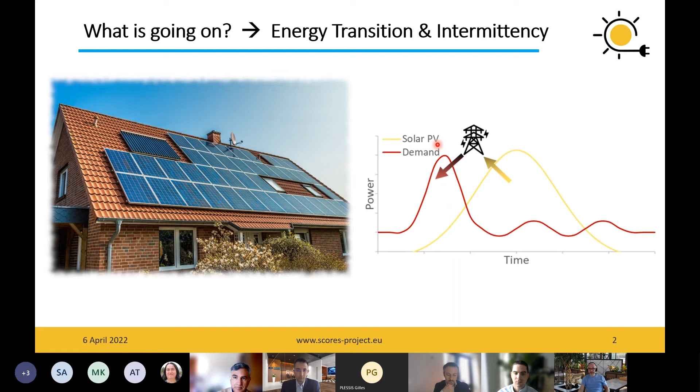Good morning everyone, I'll give you a short introduction on the SCORES project. So what is going on, what is it all about? It's all about the energy transition and the intermittency it will give us. You can put PV panels on your roof, but at times when you want to cook, there's no sun, and when there is sun, you don't have to cook. So there's intermittency and a mismatch between production of sustainable energy and the demand for it.

Furthermore, for example in the Netherlands, our local grids are really at their limits. You can't just put an additional wind park in some regions in the Netherlands. It's the same in some other EU countries, and this means we have very limited possibility for installation of large-scale renewables like PV and wind parks. Even sometimes the PV panels on the roof of domestic buildings cannot deliver back to the grid. This means a lot of energy is wasted.

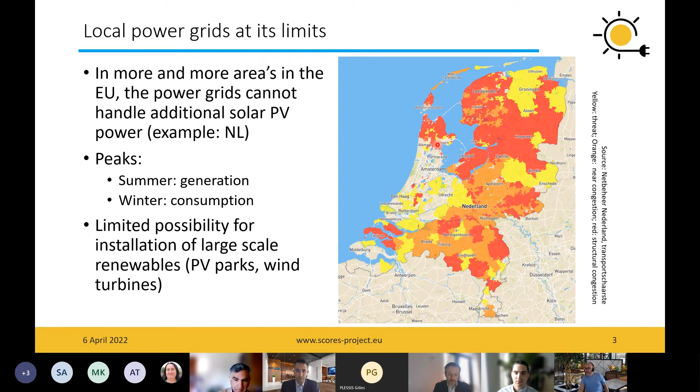A solution for that is to use storage. So the SCORES project is about self-consumption of renewable energy by hybrid storage systems. It aims to combine and optimize multi-energy generation, meaning electricity and heat, storage and consumption of local renewable energy and grid supply. Via the development of these compact storage technologies, we integrate everything in a building using a building energy management system, leading to reliable operation over the year with intermittent energy supply and demand. We are also looking at cost, because we want a positive business case.

The SCORES project has 12 partners. It started in 2017 and runs until this month, April, so this is the last month of the project, with a budget of about 6 million euros.

This is the overall concept. In the middle we have the SCORES hybrid system: we have electricity storage, it can convert electricity to heat, and we also have heat storage in the project. On the input side, we have surplus renewable energy from the grid if available, locally produced electricity, and district heating; we could also have grid feeding in from industrial waste heat, for example. On the demand side, we have apartment buildings and houses with space heating, domestic hot water requirements, electricity use, and we can also feed our PV back into the grid if possible. So how can we optimize this whole system such that no energy is wasted anymore?

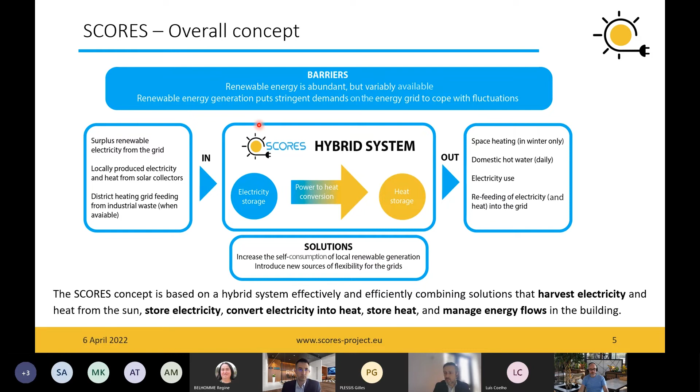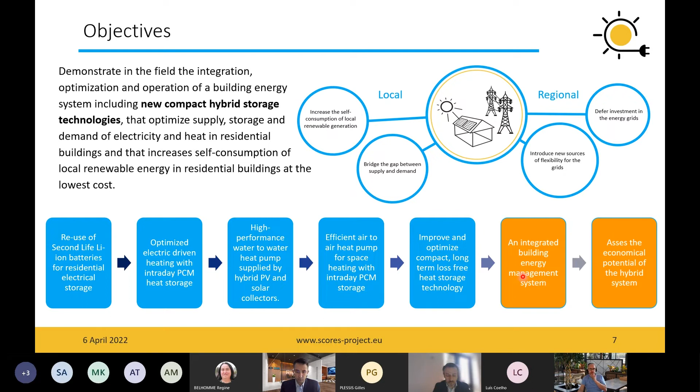The objectives of the project are to demonstrate in the field of integration, optimization, and operation, new compact energy storage technologies, connecting the urban environment with the local and regional environment. We develop 5 main technologies - I'll come back to that later and show some pictures. Then we integrate everything using a building energy management system, and assess the economic potential of the total system.

So these are the demonstration cases. We have 2 cases, one demo in Austria and one demo in France. The Austria case has a connection to the heat grid, and the France demo does not, because in France mostly cooking and heating is still done with electricity.

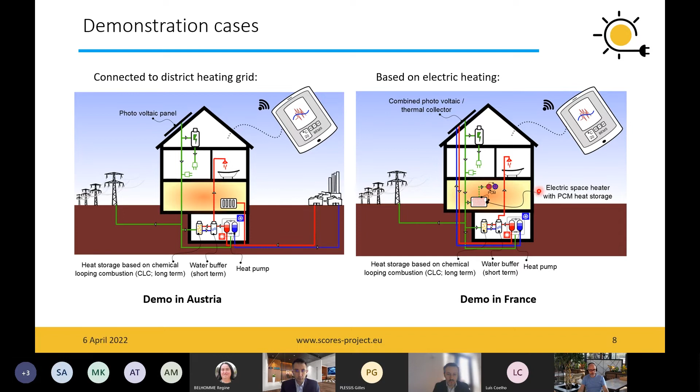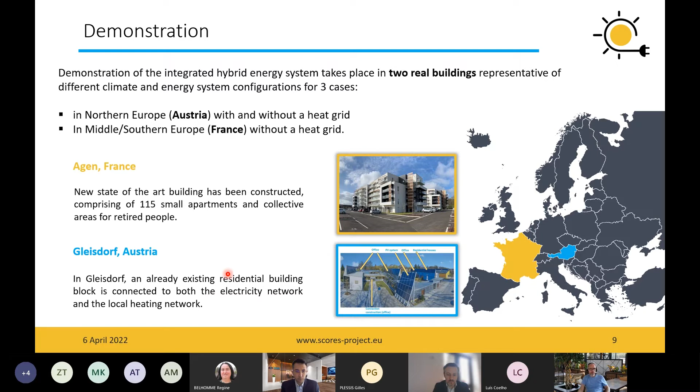So Agen in France is a new constructed apartment building with 115 small apartments. And in Gleisdorf, Austria, we use an already existing residential building block connected to both electricity and local heating networks. So 2 regions in Europe with different climate conditions.

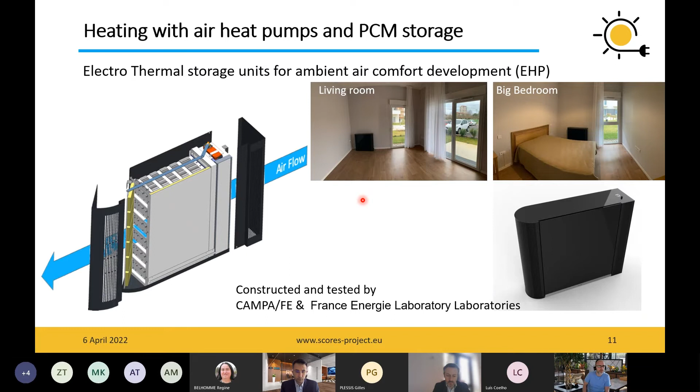Now I will quickly go through the technologies I mentioned earlier, giving you some pictures and ideas. What we developed is heating with air heat pumps and PCM storage. Here you see a picture of it in a room - you can install this in the living room or a big bedroom. It can heat your room, but it can also temporarily store heat, for example at night when you use it, and in the daytime we can charge it using PV panels.

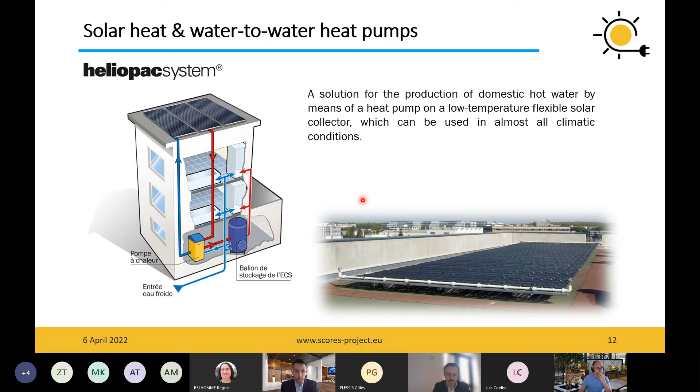We also installed and demonstrated water-to-water heat pumps. That's a solution for production of domestic hot water. We're using low temperature flexible solar collectors on the roofs, and then a heat pump to raise the temperature from water for use, for example, in showering or heating.

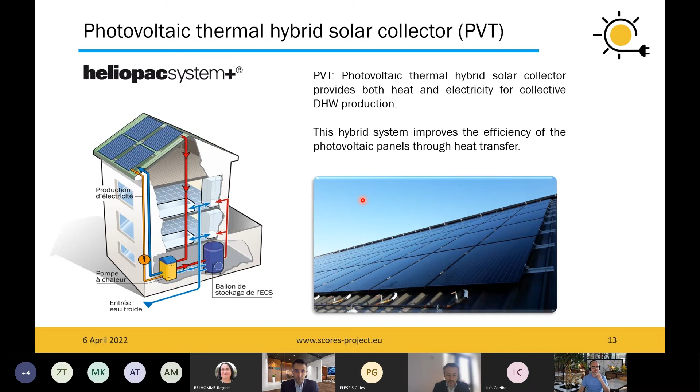We also use photovoltaic solar collectors, but hybrid, so both PV and heat. This hybrid system improves the efficiency of the photovoltaic panels through heat transfer because it lowers the temperature of the PV. So you get more out of your PV, and also get heat delivered at the same time.

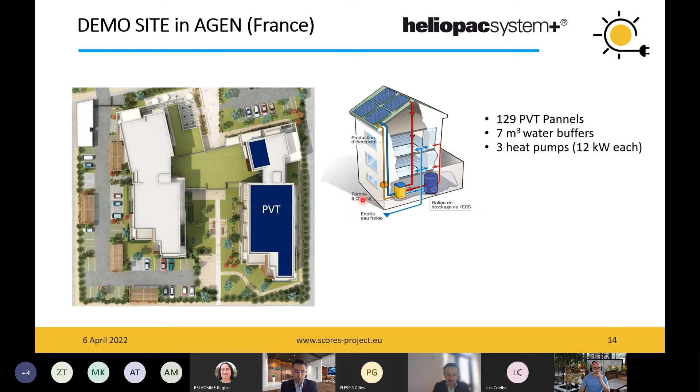So this is the layout of the demo site in Agen. We have 129 PVT panels, 7 cubic meters of water buffers which is also heat storage, and 3 heat pumps. On these roofs we put PVT panels, and that looks like this.

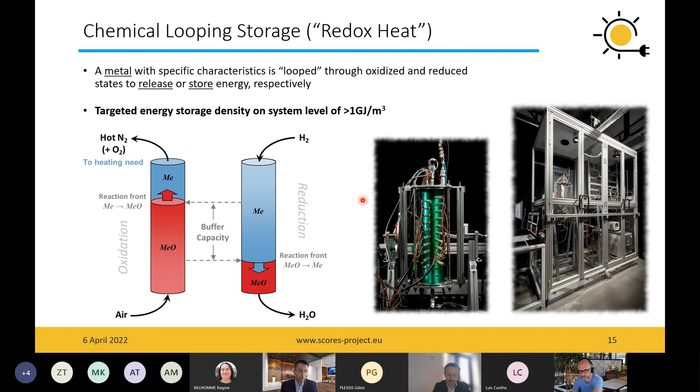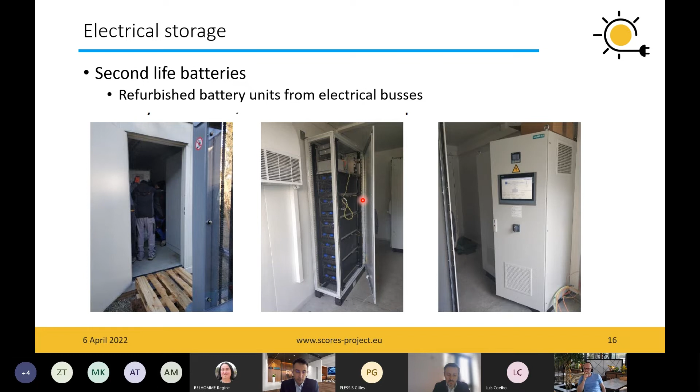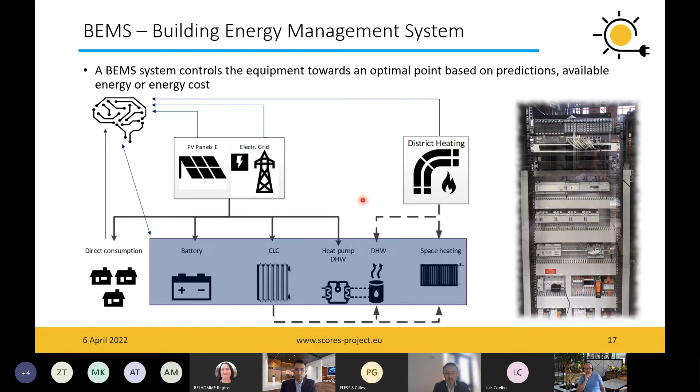Finally, we connect everything together using a BEMS, a building energy management system, that controls the equipment towards an optimal point based on predictions from the weather and also the available energy or energy cost. So it can take from the grid, deliver to the grid, use the PV electricity for direct use, or store it, with a smart grid algorithm to optimize everything towards optimal use, self-consumption, or economic benefits.

Also, this holds for the batteries, actually. We learned from the second life batteries that these battery cells are proprietary to the brands that you use. There are, for example, control systems in batteries that we cannot open up. They're not open source, so we sometimes don't know how to connect them properly, and this is very important in the future. We would not now suggest using second life batteries, but just use first life new batteries for electricity storage. But when we started in 2017, we had a different opinion.

So standardization of technologies is important. Grid aspects are important for heat and electrical grids. It's about capacity of the grid. If you want to have flexibility of the grid and feedback options, this should be possible somehow. It's not possible everywhere. So there comes the role of the grid operators, smart grids. If you want to optimize in an urban community, you need to also have smart grids providing data to a central point and distributing the energy in an optimal way.

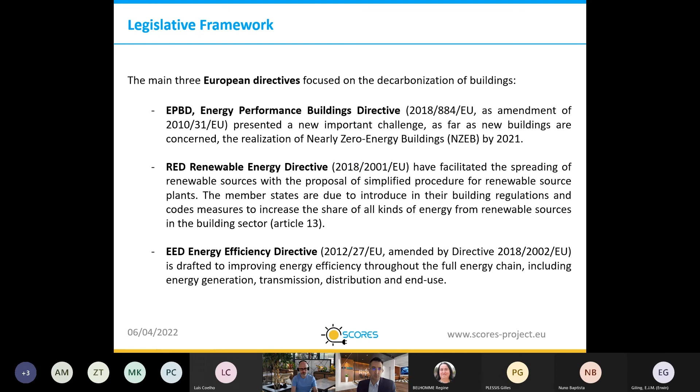I want to focus first of all on a concept and what happened from the directive of 2010 and the recast that we foresee in 2022. We start to talk about near zero. We have talked until now about near zero energy buildings.

So we reduce the consumption and use half of the energy from renewable sources. But we will transition to another concept. The new directive talks about zero emission buildings.

So we start to define this building where CO2 production should arrive at a very, very low level. So the focus is not on energy, but the focus is now on emissions, and which is the main tool we can use to reach this emission reduction is defined in the recast proposal.

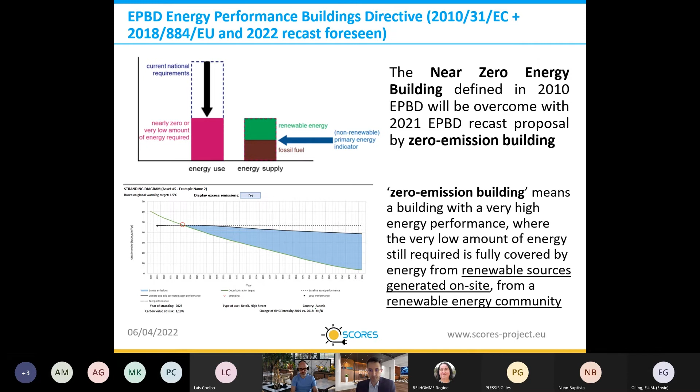They talk about production with renewable sources generated on site, like the SCORES project proposes, and the renewable energy community. So it's become crucial to store the energy and try to produce as much as possible the renewable energy on site.

I show you the main pillars of the EPBD directive, and in red I show you the news that we foresee about the upcoming recast. So there is the methodology of calculation, minimum requirement. We'll see all these aspects in the next slide.

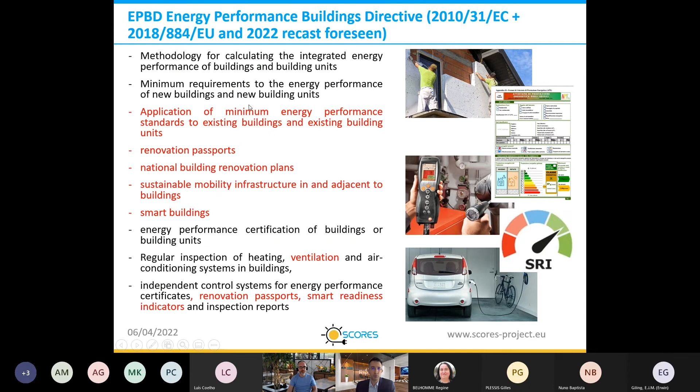There is also some news about the minimum requirements, so I want to show you this aspect too. About the minimum requirement of energy performance of buildings, we start talking from 2027 about zero emission buildings. All new buildings occupied or owned by public authorities from 2027 will become zero emission buildings.

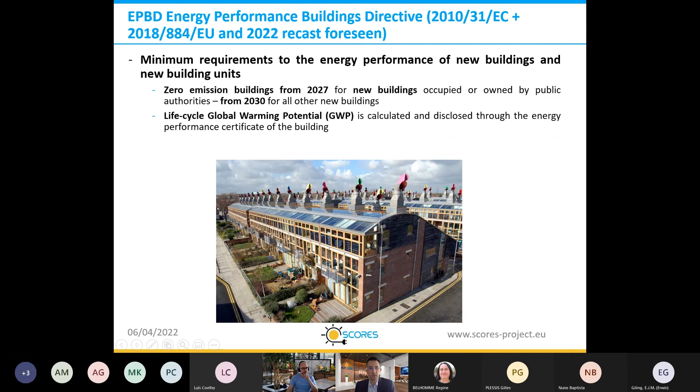And from 2030, all other new buildings will become zero emission buildings. Another important point is that the life cycle global warming potential is being included into the energy performance certificate. As we already saw, the global warming potential, the CO2 production, has become one of the most important indicators.

In the future of building environmental evaluation, another aspect that is very controversial, because it could have a very strong impact on the life of people and on the whole real estate world, is a standard for energy performance of existing buildings.

Until now, all the European legislation talked only about the improvement of energy performance on new buildings, or refurbished buildings, or when you change the boiler or the generator. In this case, we're starting to talk about existing buildings, and it's required from 2027 to 2033.

That also the existing buildings, the worst, most energy inefficient ones, shift their energy performance at least to class F or class E, and should shift their class.

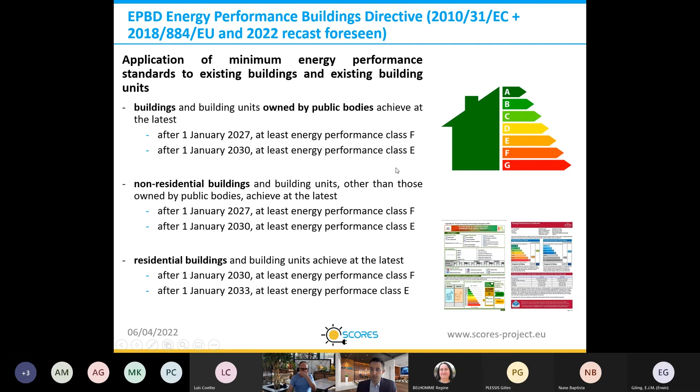So will it be required intervention also for existing buildings? I don't know how the member states interpreted this. I don't know also if this aspect, that is very controversial as I've seen, will be included into the final version of the recast, but the document shared by Europe right now does include this aspect.

Another interesting news is the inclusion of a new document called the renovation passport, quite similar to the energy audit, because it includes in the building analysis a focus on renovation steps in order to transform a building into a zero emission building by 2050. It should include the expected benefits in terms of energy saving, savings in bills, operational greenhouse emission reduction, health and comfort in the building, and information about financial and technical support to achieve this objective.

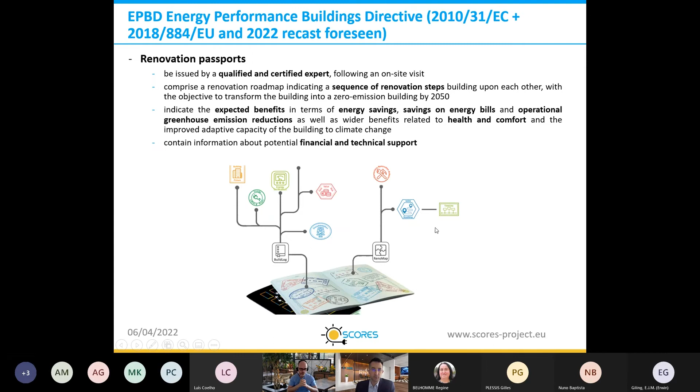Other aspects included in the EPBD are the inclusion in new buildings of electromobility infrastructure, and self-regulating devices to regulate indoor temperature, plus the obligation for all non-residential buildings to have a building automation and control system. This is very important for SCORES, because in order to manage all the energy coming from different renewable sources, a building automation system is crucial, fundamental - we cannot avoid having this system, and it became an obligation for all non-residential buildings as well.

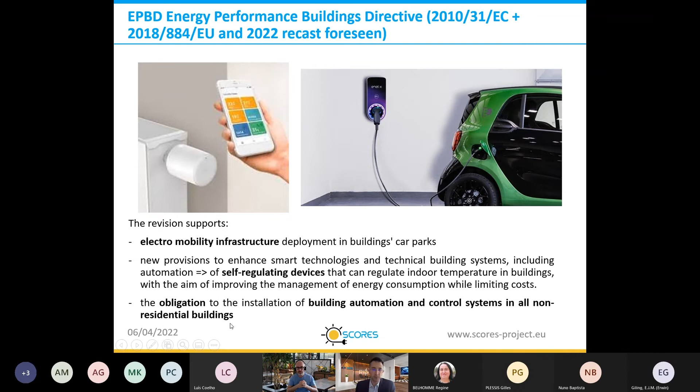About the smart readiness indicators - it's a new tool that shows you the smartness of the building. So it shows if a building and its BMS manage to adapt to the operational needs of the occupant, optimize the energy performance, and allow energy flexibility.

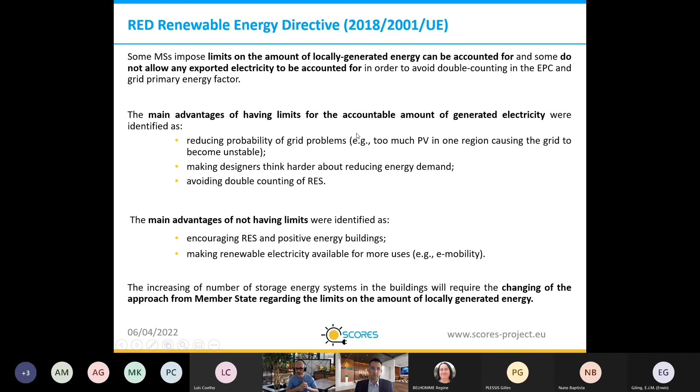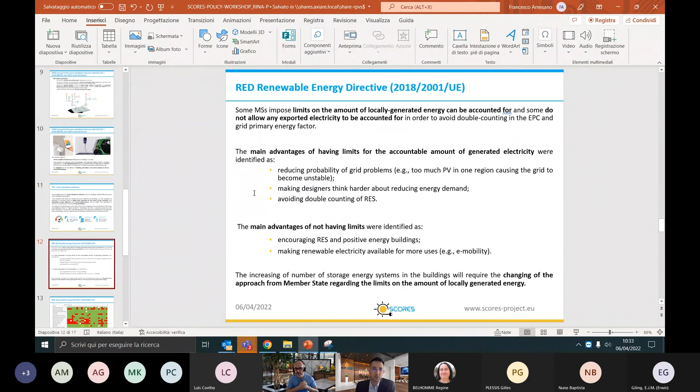I can conclude my presentation with this. I'm more focused on this aspect, but in the presentation you'll also find some indication about the Renewable Energy Directive, Energy Efficiency Directive, and the internal market for electricity as well. Thank you, if there is some question, I'm available.

Thank you very much, Francesco. Are there any questions from the audience or from the co-presenters of today? If not for the moment, I would like to thank you, Francesco, again for your quite complete presentation about the legislation and regulation aspects of storage technologies in general in the built environment.

I would like to invite now our following speaker, Nuno Baptista from Adene, to present us his view on these topics. Let me first briefly introduce Nuno. He is an architect and coordinator of the Building Energy Performance Certification Scheme in Adene, which is a Portuguese energy agency. He joined the building department in Adene in 2010, working on quality assessment and on a managing platform for issuing energy certificates. He will present us today his view on this topic of legislation in Portugal.

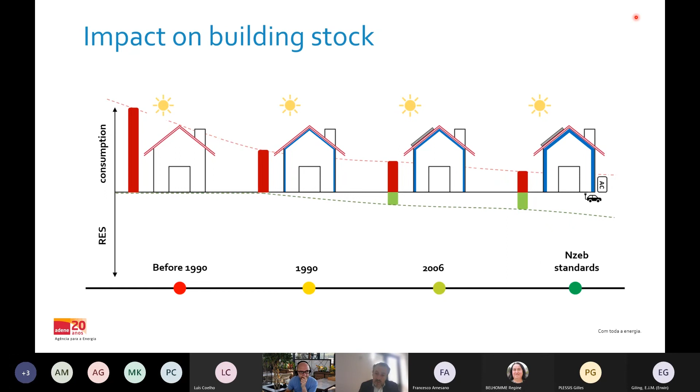So basically reducing the energy consumption and improving the amount of renewable energy sources, we tend throughout the years to achieve NZEB standards, and hopefully from the upcoming directive, zero emission buildings throughout the years. These latest regulations also include electromobility and other aspects, allowing us to have more intelligent and more interconnected buildings throughout the years.

The requirements that buildings must comply with include requirements for the building envelope, windows, technical building systems, as well as energy performance and thermal comfort requirements.

But building owners must have some additional obligations regarding this same building. So they need installation and maintenance obligations, reports, technical system documents. Where applicable, they need periodic audits, building automation and control systems, electromobility, technical systems inspections, and control of indoor air quality. So a lot of obligations that building owners must comply with to have this kind of building and to have them in the normal running stage.

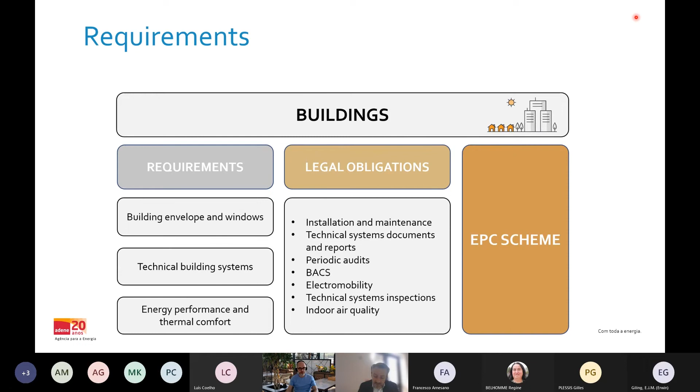And the third part of the regulation focuses on the energy performance certificate scheme as a whole.

Apart from this building regulation, Portugal, as well as other member states, had to put in practice this long-term renovation strategy, focused specifically on building energy renovation. The idea is to have, by 2050, a building stock that is decarbonized, very efficient in terms of energy use, and upgraded to these NZEB standards.

All the policies and actions that support this strategy were designed to foster deep renovation of these buildings, and the idea is to try to diminish and overcome what we have as less efficient buildings, and again focus also on reducing energy poverty.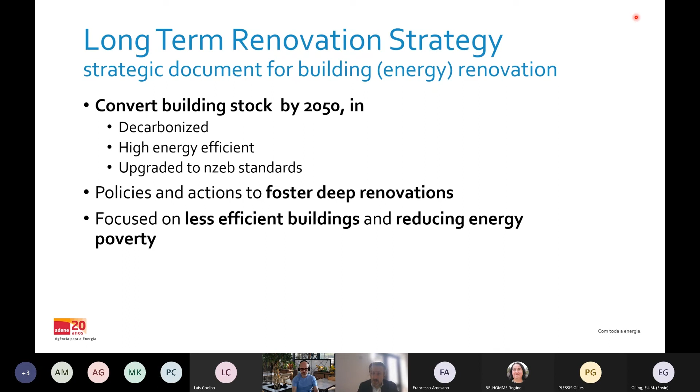The long-term renovation strategy sets 3 goals. The first one tries to focus on the improvement of the living conditions for building occupants or tenants, this being one of the major issues that were identified also in studies regarding energy poverty.

It's also an opportunity for economic growth and a means to achieve the energy and environmental goals that Portugal has agreed upon. On top of that, due to this COVID scenario, it's also a possibility for a revival of the economy after these years of pandemic that we still live in.

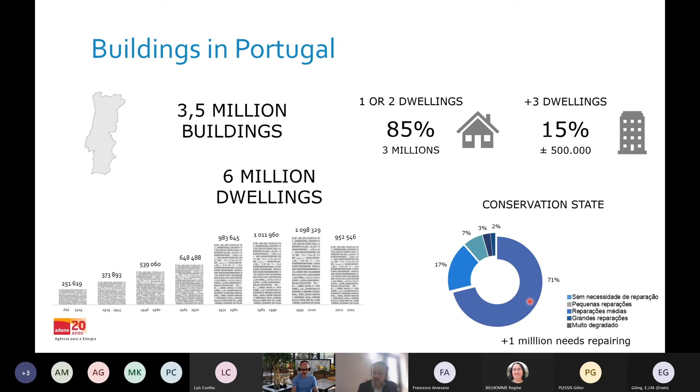According to the National Institute of Statistics, we have still a quite significant share of buildings that already need repairing. So the idea is to try to combine the need for repairing with these strategies and try to boost the renovation and improvement of these buildings.

Like I said, until 1990 there was no regulation that applied to buildings, and we see that almost 4 million out of those 6 million dwellings were built before 1990. So we have a significant amount of buildings, or dwellings, that don't have any requirement or concern, when they were built, regarding comfort or pathologies, or trying to improve the quality of living for those tenants.

Throughout the years, we had different regulations that applied. However, the number of buildings that were built within this scope is much more reduced. So no matter how demanding these last 2 regulations were, they tackle a very reduced amount of the building stock.

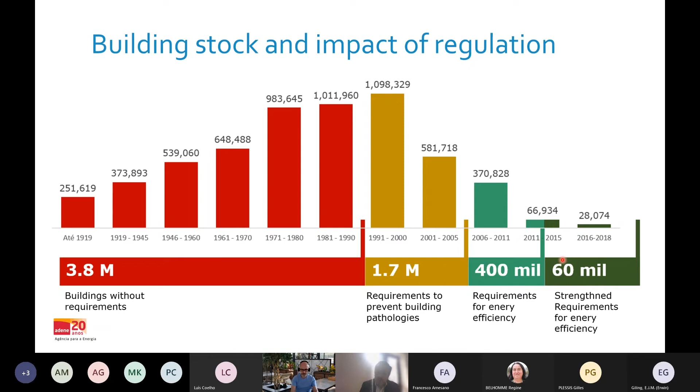The energy performance certificates scheme, we consider it a very robust system. We have had it for 14 years now, more than 2 million EPCs already registered, more than 3.5 million recommendations or improvement recommendations proposed.

Over these 2,200 experts scattered throughout the country. The investment of these recommendations is estimated at over 10,000 million euros of investment, and 1,300 million euros per year expected savings if these measures were applied to the buildings.

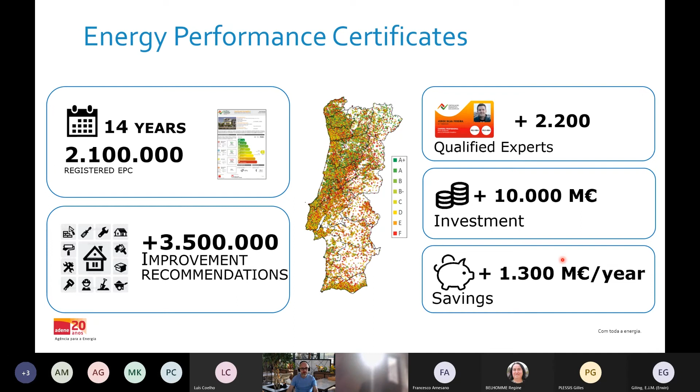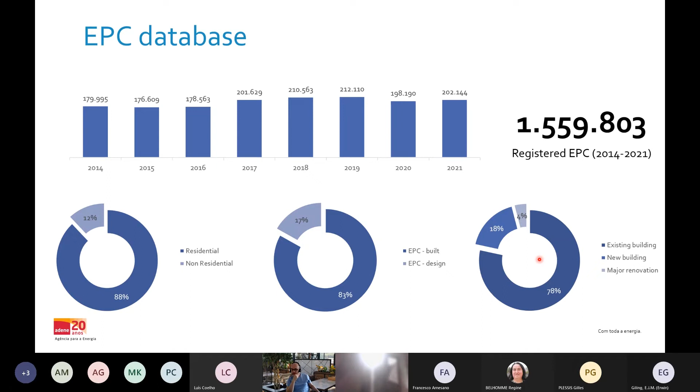Quick overview of the last years: a number relatively constant of almost 200,000 EPCs issued per year, mostly residential, 90% residential. More than 80% of these EPCs were for already built buildings, and only a small share issued at the design stage, where a high level of energy performance must be achieved. Most EPCs are issued for existing buildings, and only a small share for new buildings or major renovations, which remain a more reduced share of the EPCs issued in Portugal.

This is the percentage of energy labels that we have. We have an inefficient building stock, almost two-thirds on the lower grades. This blue line shows the amount of renewable energy sources for each label: a big percentage of renewable energy sources in the high-efficiency buildings, then down to close to zero on the worst classes.

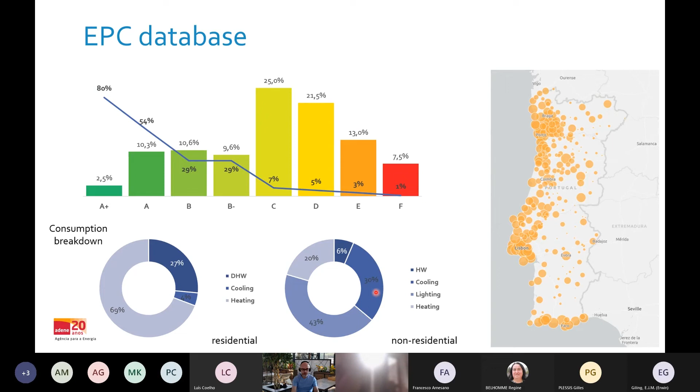For residential buildings, the most significant share of consumption is for heating, followed by domestic hot water, while in non-residential buildings we have lighting, followed by cooling, as the major consumptions.

How can they be improved? Mostly on building envelope, heating, domestic hot water, and windows. This is the type of recommendation forecast by the qualified experts.

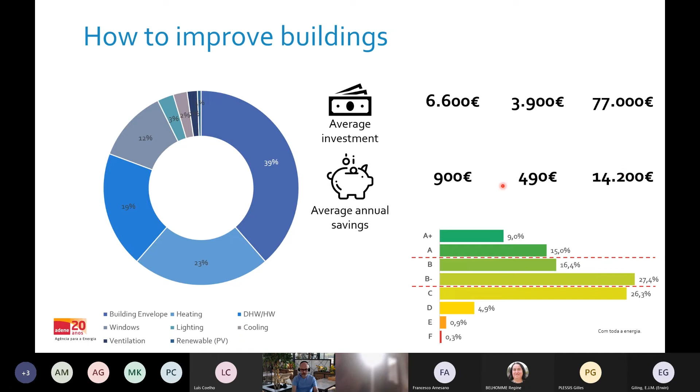The average investment ranges from 6,600 euros per apartment, with expected savings of 900 euros per year, up to 77,000 euros with 14,000 euros savings for large non-residential buildings. This is a small non-residential building here in the middle.

How can we help buildings be renovated? This recovery and resilience plan opened a call for more sustainable buildings, in this case residential. We had already over 82,000 applications in less than a year, over 22,000 in less than six months of this call.

Over 22,000 applications were already paid, focused mostly on PV installation—40% for PV installation, 35% for window replacement, and 25% for heat pumps. So a huge amount of high-efficiency equipment and PV installation being installed on these buildings.

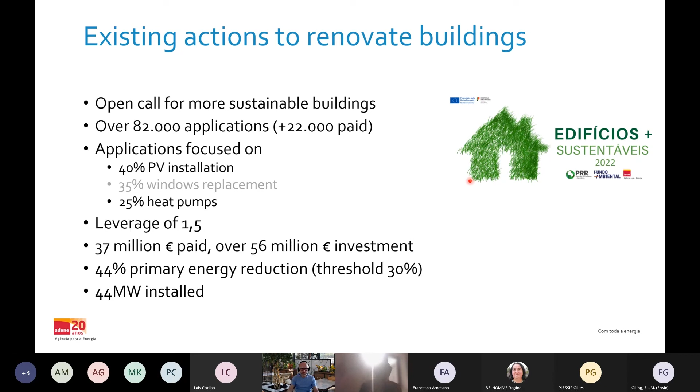We have a leverage of 1.5, so 37 million euros paid, representing over 56 million euros of investment, 44% of primary energy reduction, with the threshold being 30%. So good results here, and 44 megawatts installed in terms of all this equipment.

My last slide—the previous slide was for residential. For non-residential, what we have is a maximum of 200,000 euros per application for non-residential buildings, and up to 5 million euros for public buildings. They have the possibility to install PV, heat pumps, solar thermal collectors, biomass equipment, and also energy management systems are eligible for this application. But batteries and storage are still not eligible so far.

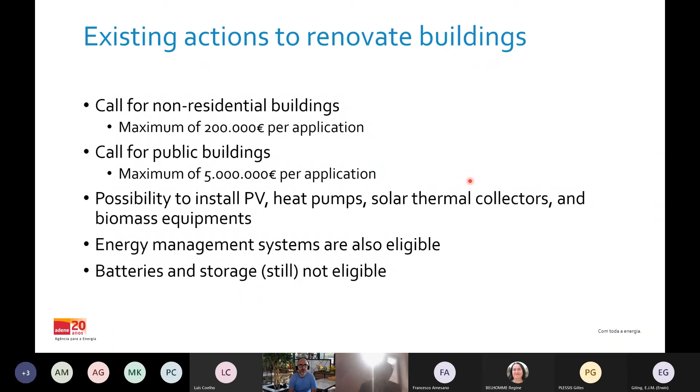The idea was for me to show what type of policies we have implemented, what type of mechanism, funding, or schemes allow for buildings to be renovated, and what are the expected results of these funding schemes. So this was my last slide. Thank you for the opportunity, feel free to ask questions.

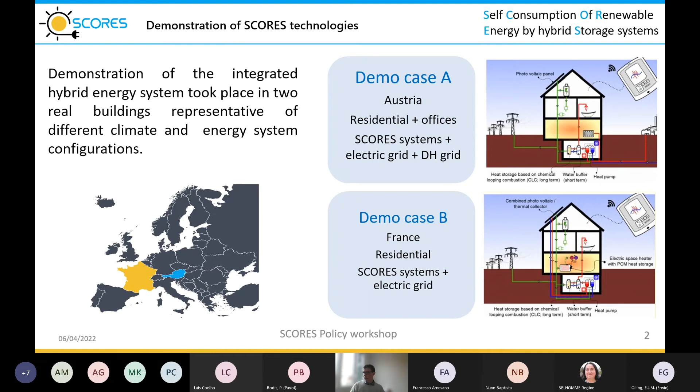A few words on this demonstration in France, focusing on demo B. The building was a residential collective building for retired people, composed of a bit more than 100 small apartments with a total collective surface area of more than 6,000 square meters. It's a quite recent building, compliant with thermal regulation 2012 in France.

That means the energy consumption, especially the share of space heating, is not so important compared to previous buildings, due to the fact that the insulation level is quite efficient. It's quite important.

We are located in the south of France, so we benefit from a warm oceanic climate, roughly 2,000 heating degree days for this location in Agen, compared to an average of 2,800 heating degree days for Europe.

No district heating connection, and as with a large share of the building stock in France, the space heating and domestic hot water system is mainly covered by an electrical system, which makes the system quite thermosensitive, and so induces some constraint on the electrical grid.

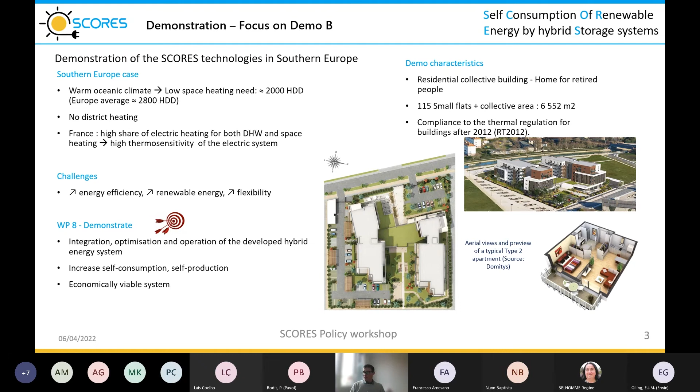Aside from the two demos that I was talking about, which were more focused on proving, assessing or validating the TRL progress for the SCORES system and being able to assess real life performance, a drawback of this demonstration is that we were able to operate them only during a few months, because it takes time to install them and make the whole component communicate between them.

So we had only not a whole year-long operation, and we wanted also, aside from that, to assess what could be the benefits of the SCORES system on a yearly basis. For that, we were relying on simulation for carrying out sensitivity and prospective analysis.

One of the first steps was having this calibration phase between the demo, actual monitored data on the demo site, and the model we were developing. That was quite important to be able to draw robust conclusions afterwards.

We had chosen a design of experiments in order to make the sensitivity analysis on different kinds of configuration, with and without heat pump, installing PV and installing PV and PVT, and also varying the storage capacity. You will see that a bit later.

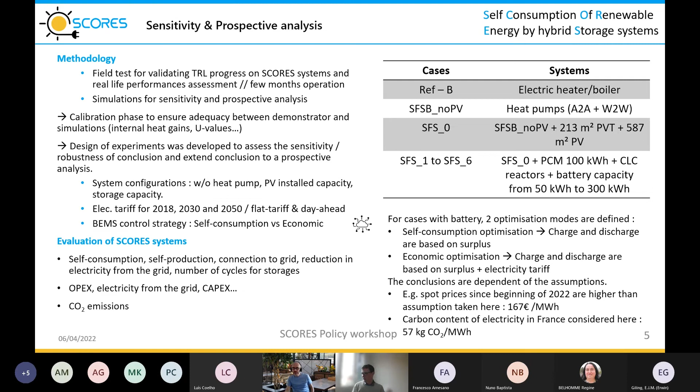Just for the reference case, looking at the monthly energy breakdown, we see a large share of energy needed for specific electricity usage, but still a not-so-minor share for space heating and domestic hot water.

Space heating is represented in orange and occurs during the winter months, and domestic hot water is shown in blue: two times higher energy consumption in winter compared to summer, due to the thermosensitivity of the building. The key performance indicator ends up at a bit more than 100 kilowatt-hours per square meter per year.

In terms of CO2 emissions, considering the French energy mix and carbon content of electricity, we end up with a building with quite low emissions, around 7 kilos of CO2 per square meter per year for this usage.

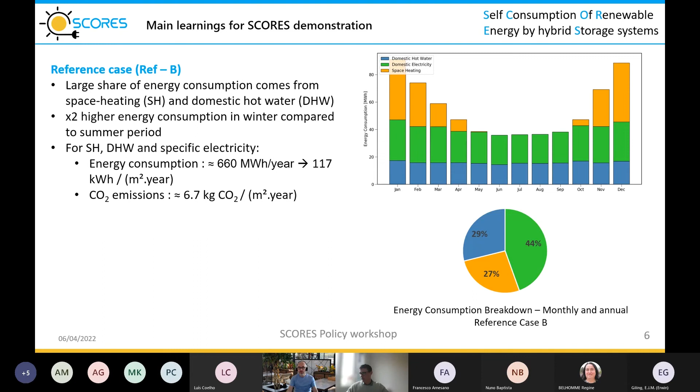Adding both the heat pump for domestic hot water and space heating, along with the PV and PVT, we've been able to identify a considerably reduced need for electricity from the grid. Basically, the PV provides a large share of domestic electricity, specific electricity use, and also contributes to the water-to-water heat pump needed for domestic hot water.

What can also be seen on this Sankey graph is that distribution losses are quite important for domestic hot water. That's a bit aside from the SCORES project, but should be taken into account when we talk about overall energy consumption.

Integrating an air-to-air heat pump also reduces the energy consumption due to space heating, because a large share of energy is provided by ambient air. The solar thermal PVT system from Heliopac is also providing a large share of domestic hot water, roughly 70% of domestic hot water need.

Nevertheless, we still have, with this reference case without battery, a large PV surplus exported to the grid, around 55 megawatt-hours per year.

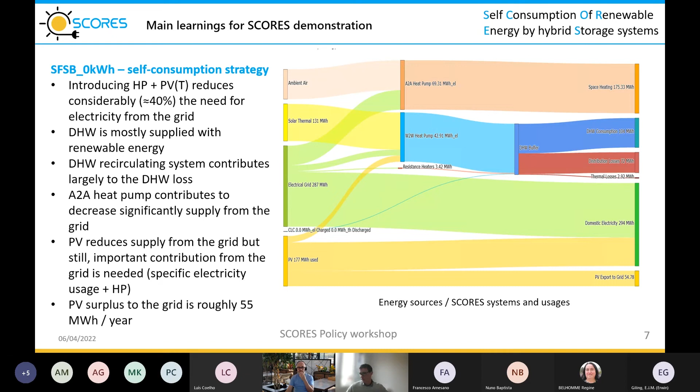Making the battery size varying, we have 6 use cases from 50 kilowatt-hours to 300 kilowatt-hours of battery size, keeping aside the PCM, phase changing material capacity, and also the CLC, chemical looping combustion storage.

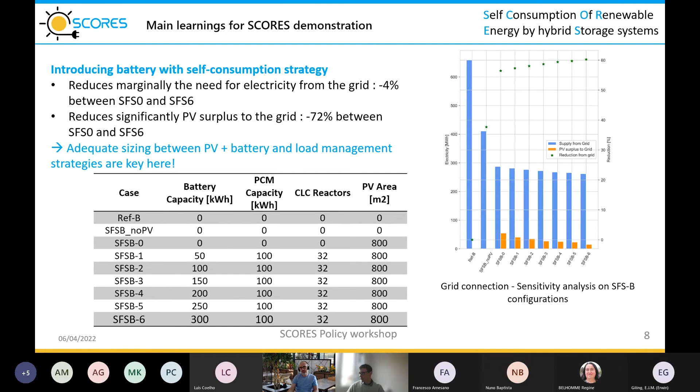So the main benefit is actually brought by PV and heat pump, and then PV, therefore the battery contributes afterward, but to a lesser extent, to this reduction. On the other side, PV surplus is really reduced by the battery, and that's also a good point of this kind of system.

Looking at self-consumption and self-production, surplus PV is much more reduced. With a large battery, we end up with 90% of PV production actually consumed locally, compared to roughly 70% for the SFSB case.

But in terms of covering local energy needs, introducing the battery, we are able to increase the self-production rate from roughly 30% to 38%.

Looking at the duration curve, we see that the peak power is much more reduced, and we have some interesting events with the grid. We are able to reduce, thanks to PV and battery, a large share of connection to the grid, exchange with the grid at low power needs.

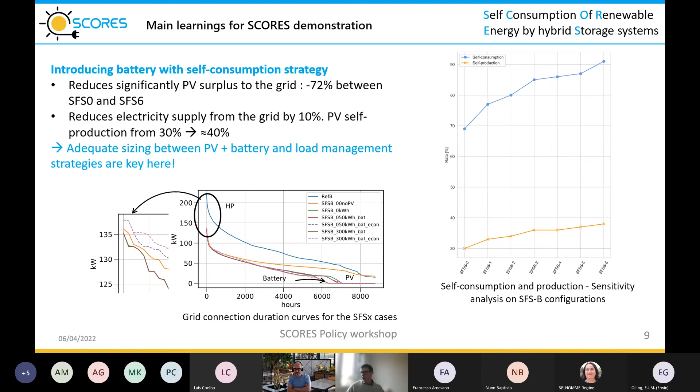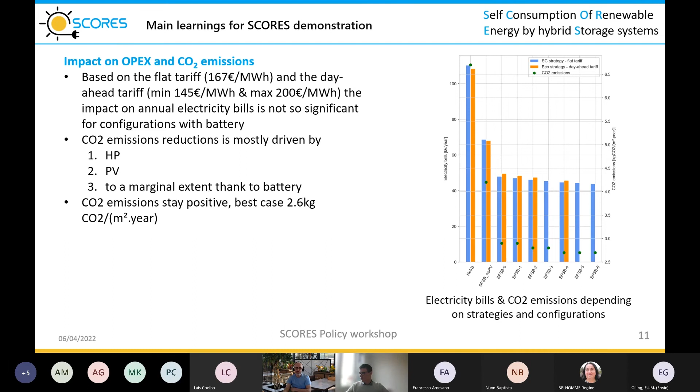So the day-ahead tariff might be a bit away from what we can see nowadays, but that's the assumption we are taking during this project, and indeed the CO2 emission is still reduced to nearly 2.5, 2.6 kilogram of CO2 per square meter per year.

So key takeaways from this presentation and the work we've been doing: the share of renewable energy might be significantly increased in buildings with SCORES-like technology, so heat pump, PCM and heat pump, PVT and water storage and so on. PV sizing and battery, the coupling between PV and battery sizing is really key. The larger the better, but it should also be adapted to the need.

In this case, we are really limited by the surface on the roof for the simulation. That's also something to remember when talking about this result. And electric batteries nowadays, it's not directly shown in this presentation, but introducing the CAPEX makes the system really expensive when you want to integrate a large electric battery.

Nevertheless, several things have changed since the project's beginning, especially a strong push for self-consumption schemes on PV and not so much direct injection anymore. The hydrogen market and electric mobility are also taking off, and that brings additional storage capacity with high power rating that could be leveraged for integrating more renewable energy resources or dealing with intermittency.

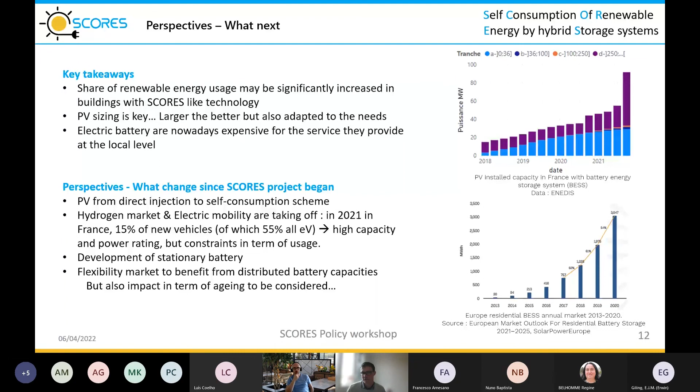I don't see any questions in the chat. I also don't see any hands raised. So my proposal would be to go ahead to the follow-up presentation from EDF, which addresses, I think, one of the main questions that Gilles has raised.

Where do we see economic value? And how is the SCORES project linked to the Magnitude project, another Horizon Europe, Horizon 2020 project, where providing flexibility to the European electricity grid systems has been investigated? I would like to ask Regine Belhomme to present us with her view on the situation.

Regine is a senior engineer and project manager at the Department of Power Systems, Energy Markets in the Research and Development Division at EDF. Her main activities concern the analysis of existing and future market design and regulatory frameworks in energy systems, and the integration of distributed energy resources and multiple energy systems. She was also coordinator of the Magnitude project that she's going to present, which has developed various business models and market analysis that we will see now in more detail.

Regine, the floor is yours. Thank you very much, Pavel. Okay, I start. So can you see my screen? Yep, very nicely. Thank you. Okay, thank you very much.

So as was mentioned, I'm going to present some learnings from the Magnitude project regarding the provision of flexibility to the electricity system. First, a few words about the Magnitude project. This is a Horizon 2020 European project, a research and innovation action. We started in 2017 and finished last year. The coordinator was EDF; in fact, I was the coordinator.

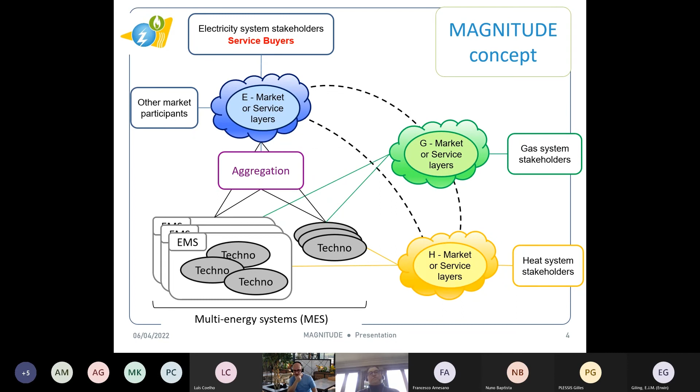In the project, we developed a whole chain of tools. First, for the simulation and optimization of multi-energy systems, for the different technologies involved in the multi-energy systems we studied. We developed the different components and modules of the aggregation platform to collect the flexibilities of the multi-energy systems and submit offers to the market. We also developed a market simulator to test innovative market designs for the day-ahead markets, and for other markets we had a market emulator that plays past sequences of markets.

The basic principle for the interaction between the aggregation platform and the multi-energy system is represented here. First, the aggregation platform sends a price forecast of the targeted market to the multi-energy system. The multi-energy system then makes its own optimization, taking these prices into account, and sends back to the aggregator the flexibility it can provide, along with the cost or price to provide this flexibility.

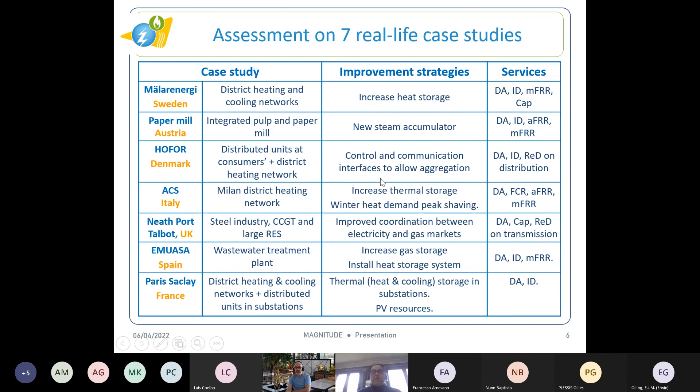Now I'm going to speak about the results of the project. The first thing is that, regarding provision of flexibility, the multi-energy systems we considered were mainly connected to distribution networks. That means they face the same issues as other distributed energy resources, like distributed generation, distributed storage, and in particular demand-side flexibility—that is, the flexibility of buildings.

They have some specificities since they involve several energy carriers, and that brings some opportunities, but also constraints. We can get flexibility through fuel shift between the different energy carriers and also demand response on other networks than the electricity network. But on the other side, we have a balancing constraint between the different energy carriers. Multi-energy systems also involve more stakeholders and more interaction, so that means higher complexity.

Now the results of the project: we have seen that multi-energy systems can indeed provide flexibility to support the integration of renewables, and they have potential to participate in energy markets, frequency ancillary service procurement, and congestion management. But this strongly depends on the technologies involved on the site, as well as the core process and the operation strategies.

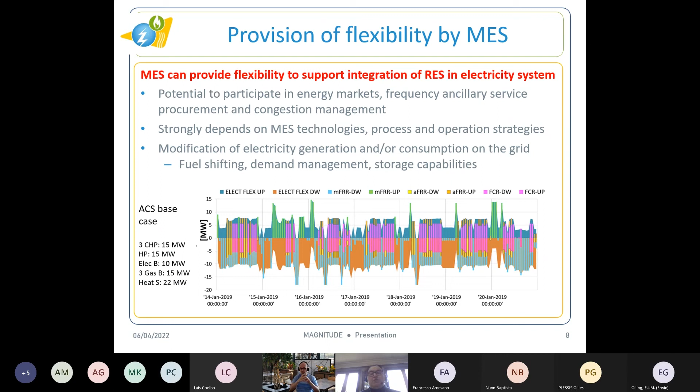So the three main levers to provide flexibility are, as I have explained, fuel shifting, demand management both on the electricity side but also on the other energy carriers, and storage capabilities.

We have seen that multi-energy systems have large potential to provide flexibility, but there are limitations. In fact, the exploited flexibility is rather limited with respect to the available one. I'm going to look at some reasons here.

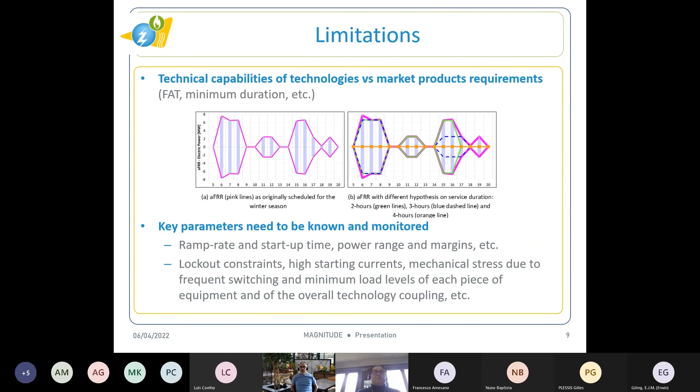That means there are some key parameters that really need to be known for the different technologies and monitored to be able to provide flexibility.

Other limitations: we should keep in mind that for multi-energy systems, and probably also for buildings, the priority is first to satisfy the needs of the main or core process. In our case, it was to supply heat, cooling, to produce paper or steel, treat wastewater, and so on. So flexibility is not the first priority, it comes after that.

That also means the multi-energy system is optimized with respect to the core process, and provision of flexibility means deviation, a change in operation plan, and so a sort of disoptimization of the multi-energy system operation. This can lead to increased operating cost, and in some cases also to increased greenhouse gas emissions.

A result from that is that multi-energy systems will participate in the market only if they can get sufficient revenues to cover their extra costs.

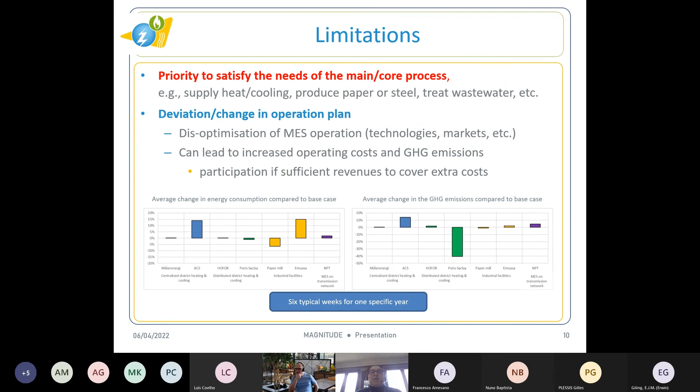Regarding improvements, the first one is, of course, the optimization of the operation of the different technologies by the energy management system on the site.

The second one we consider is the introduction or increase of storage capacities, for heat, cooling, or gas. We have seen that it depends very much on the technologies, on the period of the year, and so on. This can increase flexibility by sometimes a few percent, but in some cases it can be multiplied by more than 5.

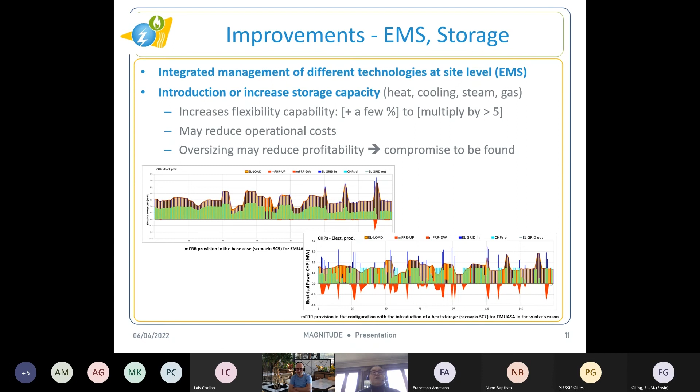This is illustrated here on the figure, where we can see without storage the flexibility appears in orange and red, and with storage, in this case, it is increased very much. Integration of storage may also reduce operational cost, but a compromise has to be found because oversizing may reduce profitability.

Another 2 minutes to go. Okay, another important...

Factor is aggregation of multi-energy systems with other resources, which allows multi-energy systems to access markets they cannot access alone, for instance due to their limitation in technical capability. Also, aggregation provides the backup needed, meaning having some resources in backup in case of failure of other resources that were planned to participate. It also helps in terms of trading complexity, as we will see later.

Provision on the market is very complex for small stakeholders. And of course, aggregation allows access to some markets where the thresholds are too high for the individual multi-energy system. That means this increases the flexibility that can be exploited, but this has a cost.

Because of course the revenues has to be shared with the aggregator, that means an additional cost has to be added to the bids, and this can have a significant impact on profitability.

Regarding market and regulatory perspective, we now see on the energy market an ongoing harmonization, but also on other types of market there are still large diversities between countries for some mechanisms, for instance balancing and frequency services, capacity requirements, and congestion management.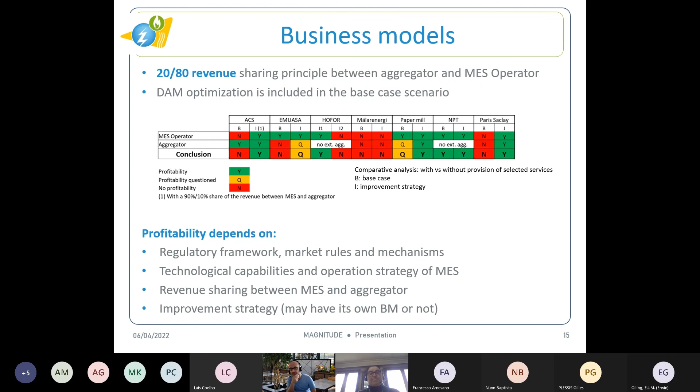But of course, business models depend on regulatory framework, technological capabilities, and revenue sharing between the aggregator and multi-energy system. This is just a list of the deliverables that you can find on our website. Thank you very much for your attention. Any questions? Thank you.

Indeed, the good question is, are there any questions from the audience maybe to start with? I don't see any questions written down. I don't see hands raised, but I do have a few questions for you, Regine.

You've shown us a very good overview of the progress in the project. My question relates to truly distributed energy storage systems that could provide flexibility. I see many examples you've shown are rather large scale applications, whether that's a paper mill or grid, heat grid systems. There was one example in Denmark where you had some distributed systems. How do you see the perspectives of distributed electric car charging, distributed heat storage systems in regular homes, not only heat grid systems? What are your perspectives on those concepts that are not addressed in the project, or don't seem to be?

In fact, in our project, we did not look at electric vehicle charging and so on. But one thing, as you have seen in the results, to access the market, first they need to be aggregated. That means that, in particular, the minimum bid threshold is probably too high for single houses. So this is one of the things.

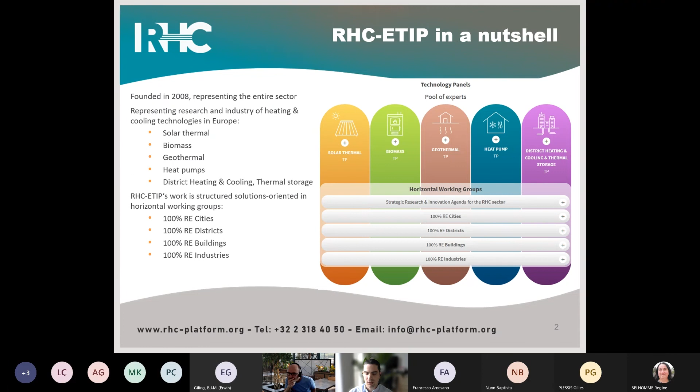In the past 3 years, the RHC-ETIP has produced 3 strategic documents. In 2019, it was the 2050 vision for renewable heating and cooling. In 2020, it was the Strategic Research and Innovation Agenda. And last year we prepared more like a report for the Commission to showcase how the priorities identified in the SRIA are being implemented by RHC stakeholders.

Very briefly on RHC-ETIP SRIA: the main objective of this document is to underline the importance of the heating and cooling sector for the successful transformation of our energy system towards climate neutrality.

It is based on the 2050 vision for 100% renewable heating and cooling, which was prepared in 2019, as I mentioned. It presents the benefits of replacing non-renewable energy source fuels by climate neutral RHC technologies in the heating and cooling sector. It also identifies the technological gaps and describes the R&I priorities needed to unlock the RHC potential.

These identified priorities should serve as input for future Horizon Europe goals for renewable heating and cooling technologies. Of course, the overall objective of RHC-ETIP and this document is to pave the way to stimulate strong uptake of renewable heating and cooling technologies.

The document is structured according to transversal topics, which are applicable to all 4 horizontal working groups: buildings, districts, cities, and industries. Then there are 4 chapters focusing on these areas individually.

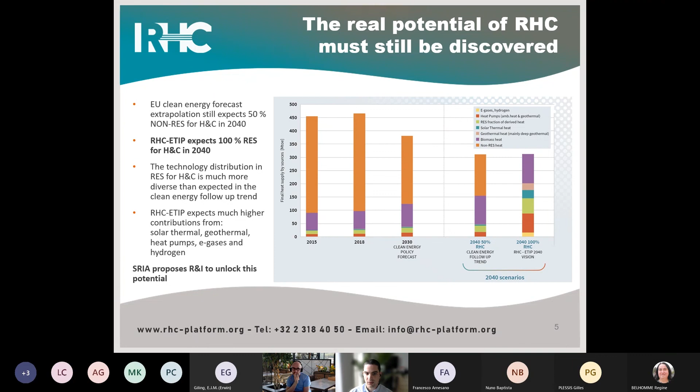The SRIA document proposes to unlock the potential of renewable heating and cooling, and it is definitely key at this time of increasing energy prices and energy security, because understandably RHC technologies could significantly lower or minimize the energy dependence on other countries and oil and gas imports to the EU.

To briefly showcase the type of priorities that were identified in the SRIA, specifically for technologies of heating and cooling, storage and distribution, which is relevant to the SCORES project: one of the priorities was to develop and demonstrate energy storage and distribution solutions for heating, cooling, and domestic hot water production integrated with renewable energy sources, both in active and passive ways. So very much in line with the objectives of SCORES project.

There was also the section on priorities for 100% RHC in buildings. The priorities identified are quite generic, because this was the wish of the European Commission to keep it this way. So renewable energy, heating and cooling technologies and systems for cost-effective retrofitting of old buildings and historical and special buildings were identified as a priority.

Renewable energy sources, fuels, technologies and systems for new buildings and their integration and external connectivity. Combined heat and power technologies and systems and their integration in old, historical and future buildings and their external connectivity was another priority identified. And then energy systems, education, training, and certification for different building categories as the last priority identified.

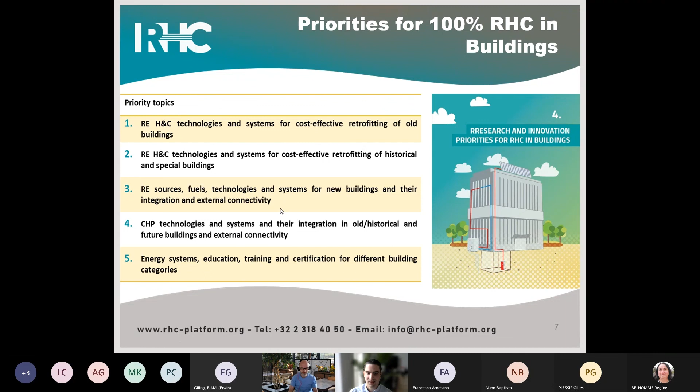So I mentioned these key takeaway messages from the document already several times. The main message of the document was that 100% renewable heating and cooling in buildings, districts, cities, and industrial processes in Europe is achievable even by 2040. And we can achieve this actually already with currently available thermal renewable heating and cooling technologies.

But raising the public-private expenditure for RHC research is crucial, nevertheless. And this should be to the average annual level close to 2 billion in order to unlock the full potential of RHC.

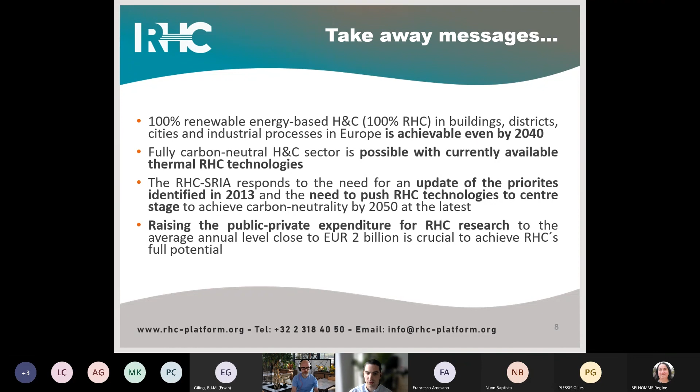The strategic document that was prepared by RHC-ETIP is in short a deployment and implementation report. So we tried to survey stakeholders to get insight into the RHC community's research, development and innovation activities and trends, and to see how the previously identified priorities from SRIA are aligned with the actual RD&I activities of stakeholders. We also identified some gaps between the world of theory of our SRIA and the actual real world of implementation, and we acknowledged these and reviewed these.

The document identified some trends, which sound quite obvious, of course, to people active in the heating and cooling sectors. So there is a trend towards cross-cutting technologies, sector coupling, integrated or hybrid systems, which would increase optimization and efficiency. Also, greater inclusion of and cooperation with other renewable technologies, particularly hydrogen-based renewable energy systems, and also district heating and district cooling, thermal energy storage, of course. RHC sectors are looking to increase the digitalization also, and investing a greater amount of revenue into RD&I activities in RHC. This was, of course, quite positive trends that we identified.

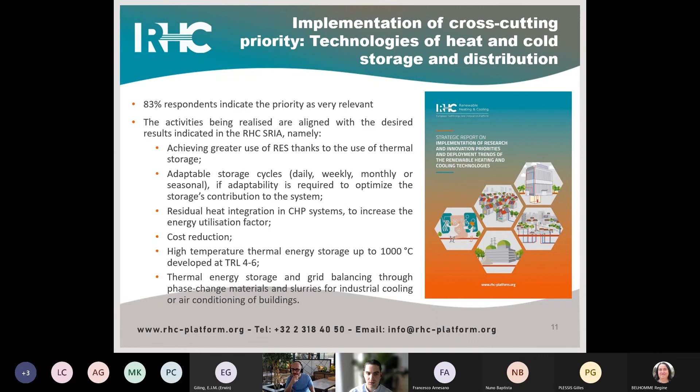Regarding the implementation of the priority identified in SRIA on technologies of heat and cold storage, and distribution, this was probably the priority with the highest indicated relevancy to respondents. So 83% of respondents indicated that this priority is highly relevant, and activities being realized are aligned with the desired results indicated in the SRIA document. So achieving greater use of RES thanks to the use of thermal storage, adaptable storage cycles, residual heating integration in CHP systems, cost reduction, etc.

Main takeaway messages from this document, again, repeating also a bit the main messages from the SRIA, that the major contribution from all renewable heating and cooling technologies will be needed for Europe to achieve climate neutrality by 2050, or 2040 if we want to be more ambitious. But this requires adequate support and funding for demonstration projects and to increase the market upscale solutions.

Greater technical assistance for the preparation of investment projects, and also more awareness from investors and decision makers about existing applications and installations. Also strong cooperative measures with research centers and other industry organizations, and widespread market support actions across the EU are a few of the required actions that should be implemented to support renewable heating and cooling development in the EU. So this is basically the two documents in a nutshell.